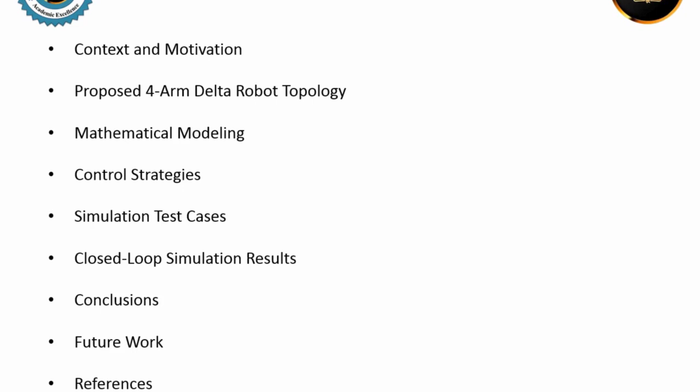Regarding the context and motivation of this work, today Delta platforms are valued for their fast movement but have mathematically complex nonlinear kinematics. Advanced control strategies are vital for adequate multi-axial trajectory tracking capability. Fuzzy logic is adept at handling uncertainty and high nonlinear dynamics, and interval type 2 fuzzy is more resilient to unpredictable disturbances.

Therefore, the objective encompasses meticulously designing, modeling, and rigorously validating a pioneering fuzzy control methodology on a novel four-arm Delta manipulator, where submillimetric accuracy and repeatability are imperative for the automated preparation, handling, and packaging of perishable foods.

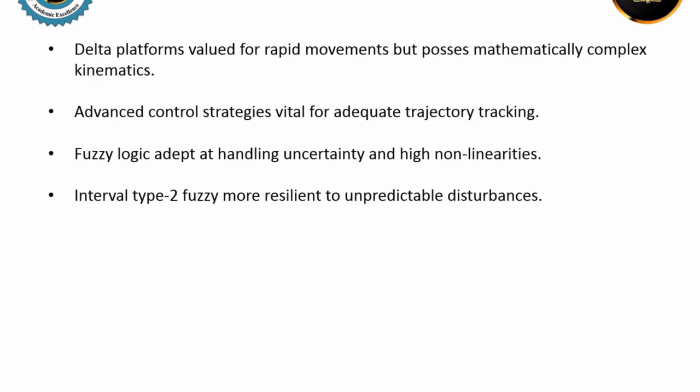The proposed four-arm Delta robot topology considers four equivalent kinematic chains with actuated rotational joints, a strategic 90-degree square arrangement, conferring 3 uncoupled translational degrees of freedom, and a lightweight 1 kilogram payload capacity.

Then, using rigid body dynamics and optimization tools, we derive comprehensive static and dynamic models encompassing a nonlinear kinematic formulation, providing both forward and inverse solutions, and an analytical dynamic model obtained via the virtual work principle.

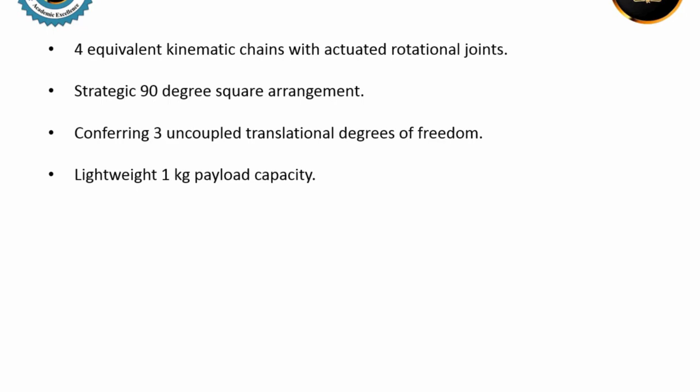Extensive modeling of the robot provides an accurate mechatronic representation and serves as a basis for designing control strategies and conducting extensive testing under strict real-world conditions. For this, direct and inverse kinematic solutions, dynamic representation through the virtual work principle, and determination of the workspace were considered.

The incorporated phenomena are viscous and Coulomb friction, delay control, structural vibrations, and joint compliance.

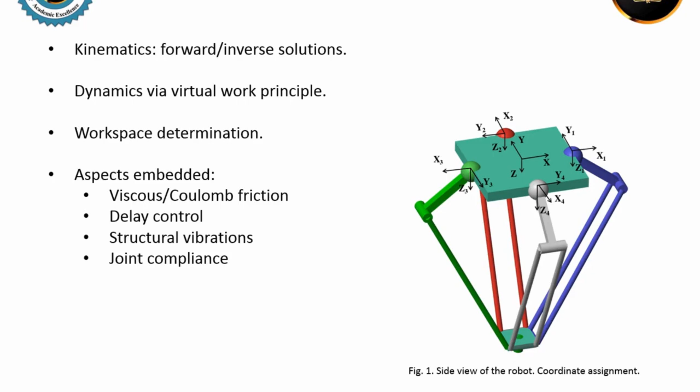Through more than 100 simulations, tracking performance was evaluated in 4 representative trajectories under conditions that reflect implementation constraints, such as control signal saturation, time delays up to microseconds, friction, compliance and damping effects.

For this, smooth quintic polynomial trajectories were considered, a conventional PID controller fine-tuned by pole placement, fuzzy PD and PID controllers with optimized non-symmetric rules, and an interval type 2 PID for uncertainty management.

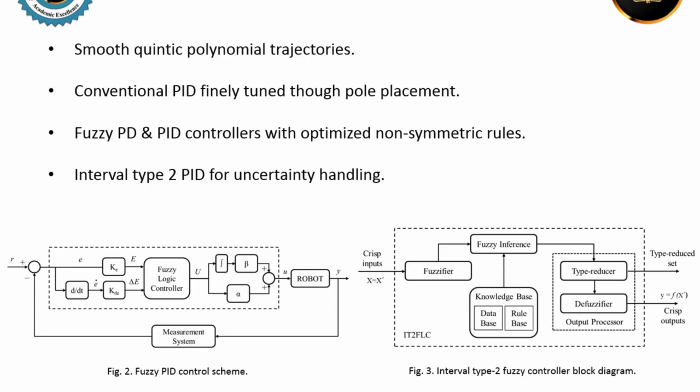To develop simulation test cases, the following were considered: 4 representative trajectories, strict real-world conditions such as actuator speed and torque limits, delays of up to microseconds, frictions, compliance and damping, and external disturbance rejection tests.

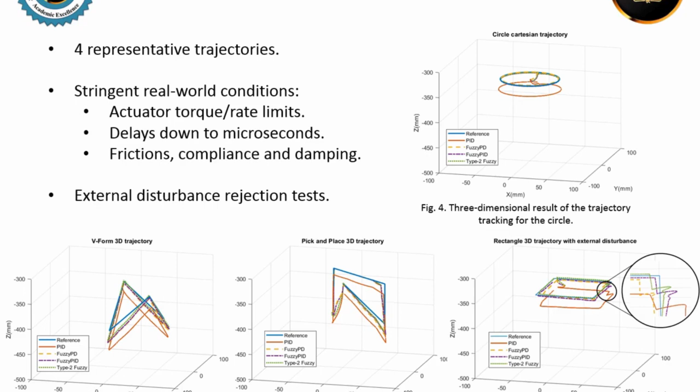The result of the closed-loop simulation showed the following. The interval type 2 PID was the one that provided the best overall performance. All fuzzy approaches far outperformed the PID controller. Excellent sub-millimeter tracking accuracy was demonstrated, and disturbance rejection was achieved 30% faster.

Therefore, the proposed modeling, design, and controller of the 4-arm Delta parallel manipulator were conclusively validated, rigorously demonstrating unprecedented precision capabilities.

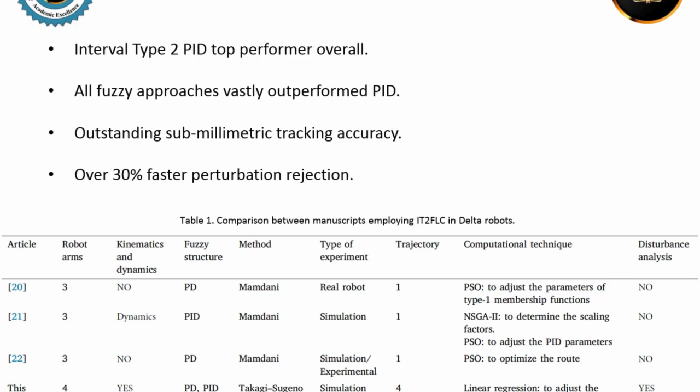This particular work allowed the design, analysis, and control of a novel 4-arm Delta parallel manipulator oriented to precision applications in the food industry. From a rigorous geometric model, forward and inverse kinematic analysis of the robot were developed. In addition, its inverse dynamics was analytically obtained by incorporating valuable realistic aspects that are usually omitted.

Cutting-edge control strategies based on Type 1 and interval Type 2 fuzzy logic were implemented and compared. The fuzzy controllers demonstrate significantly superior performance compared to the conventional PID controller in the analyzed metrics.

The interval type 2 fuzzy logic controller with PID action demonstrates the best trajectory tracking capability and disturbance rejection, validating the potential of this advanced technique for complex and highly nonlinear manipulators such as the one studied.

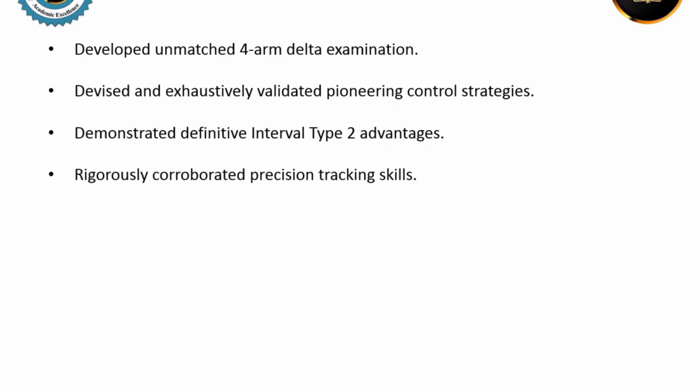Furthermore, the incorporation of realistic elements such as saturators, delays, and dynamic effects in joints adds greater realism to the analysis and lays the foundation for a reliable digital twin of the robot, fostering future work on physical implementation.